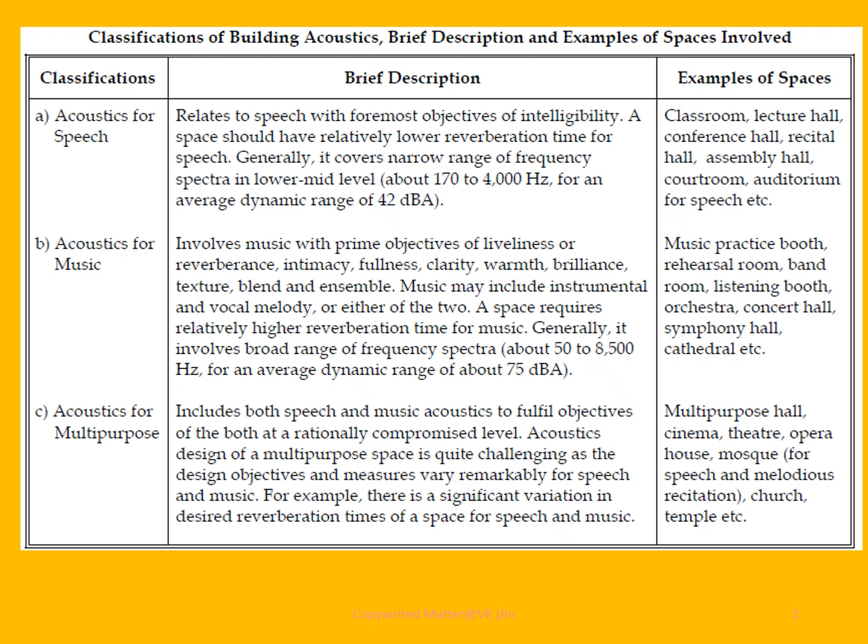This particular multipurpose acoustics is used in multipurpose hall, cinema, theater, opera house, mosque for speech and melodious recitations, church and temples.

Friends, some useful definitions with respect to auditoria. Auditoria is an enclosure, covered or open, where people can assemble for watching a performance given on the stage. Cinema: an auditorium where the performance is in the form of pictures projected on a screen with or without the

accompaniment of scenic atmosphere. Next is conference hall, a hall intended for use by participants, sometimes with non-participating audience also, in a discussion or deliberation of a topic in the form of speech or conversation made by one person at a time seated anywhere in the hall.

Crush hall, the first entrance hall, sometimes provided in addition to foyer outside the main hall for purposes such as buying tickets, waiting, etc. Aisle, the gangways left within and around the sitting area for walking into or out of a group of seats, to be continued.

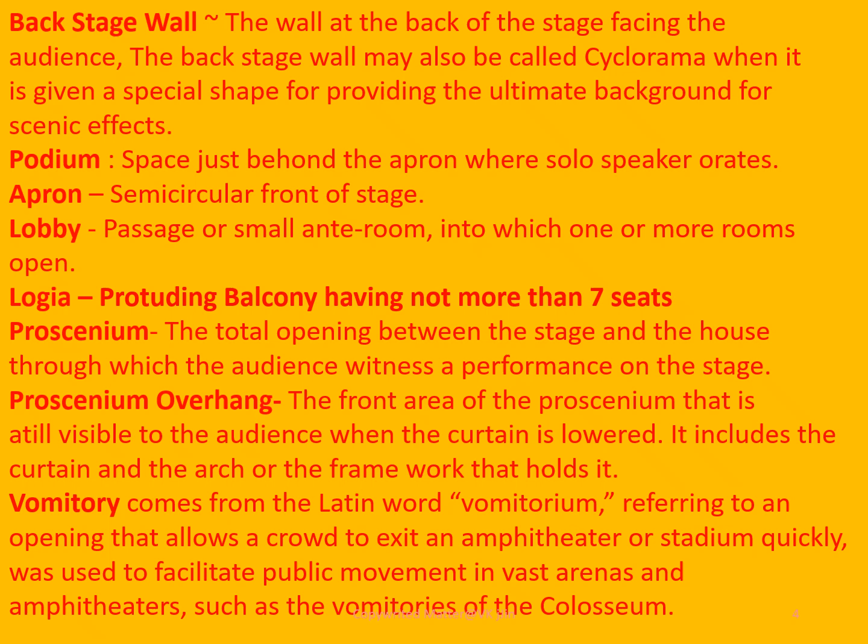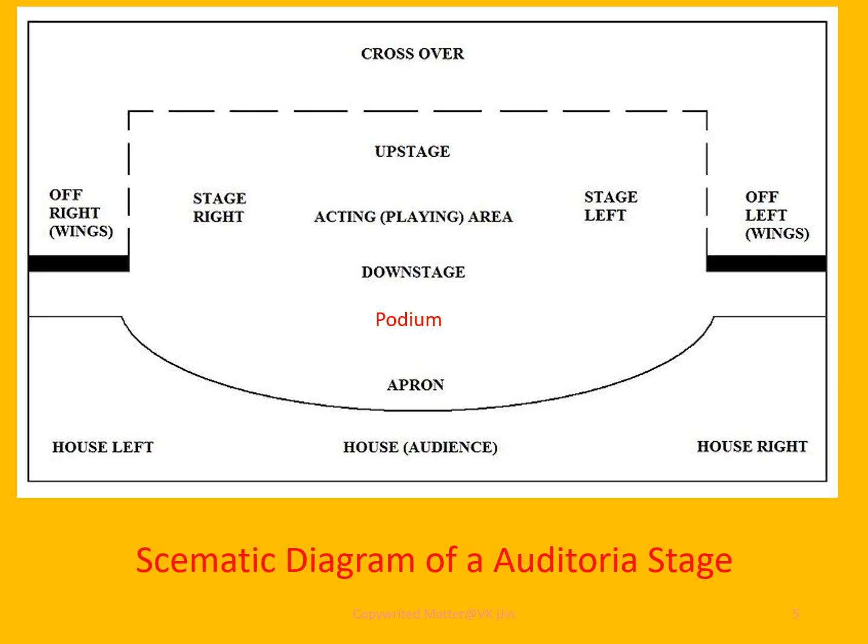Friends, now on to cyclorama. A cyclorama is a large curtain or wall, often concave, positioned at the back of the stage area. It was popularized in the German theatre of the 19th century and continues in common usage today in theatres throughout the world.

A cyc can be made of unbleached canvas or muslin, smaller version. filled scrim popularized on Broadway in the 20th century. Or seamless, translucent plastic, often referred to as opera plastic.

The cyclorama can also be a plain cloth or plastered wall filling the rear of the stage of a TV studio, often used as a sky backing to the traditional set or as the main backing for a dance piece.

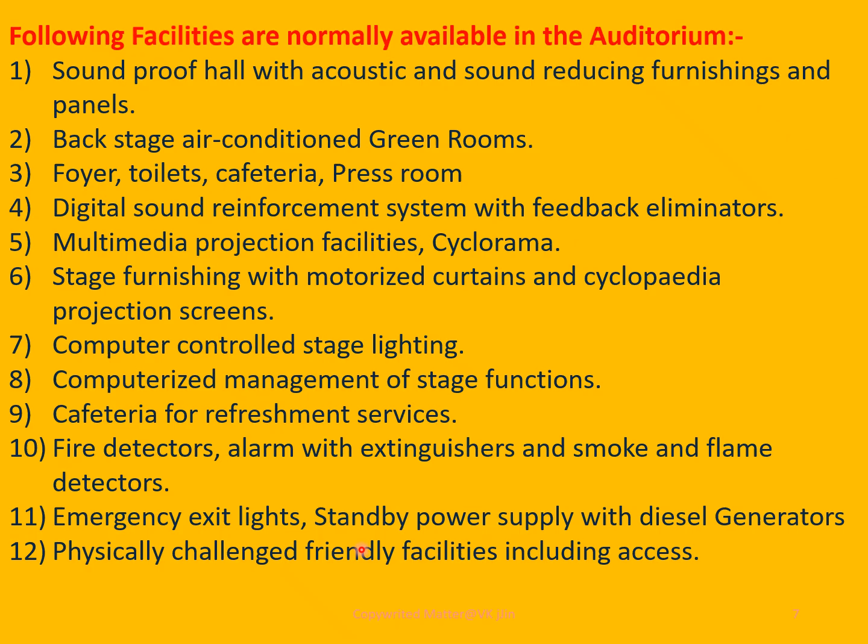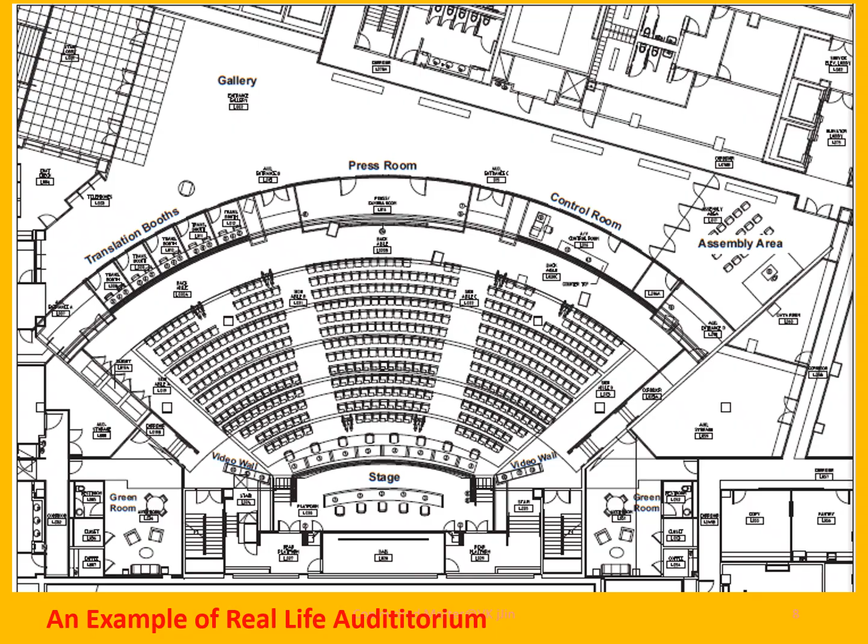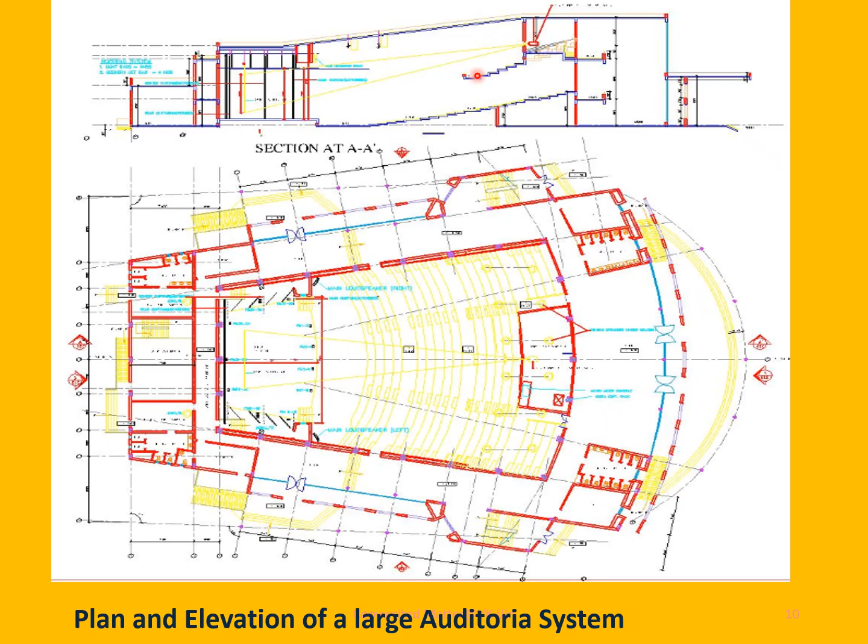Friends, this shows a detailed AutoCAD drawing of an auditorium. Pit tier refers to the rear section of seats on the main ground floor. This is the auditorium and various parts are shown here. Here is the proscenium box, then this is the apron area. There is an orchestra pit where musicians and other people can sit, which will not come into view of watchers.

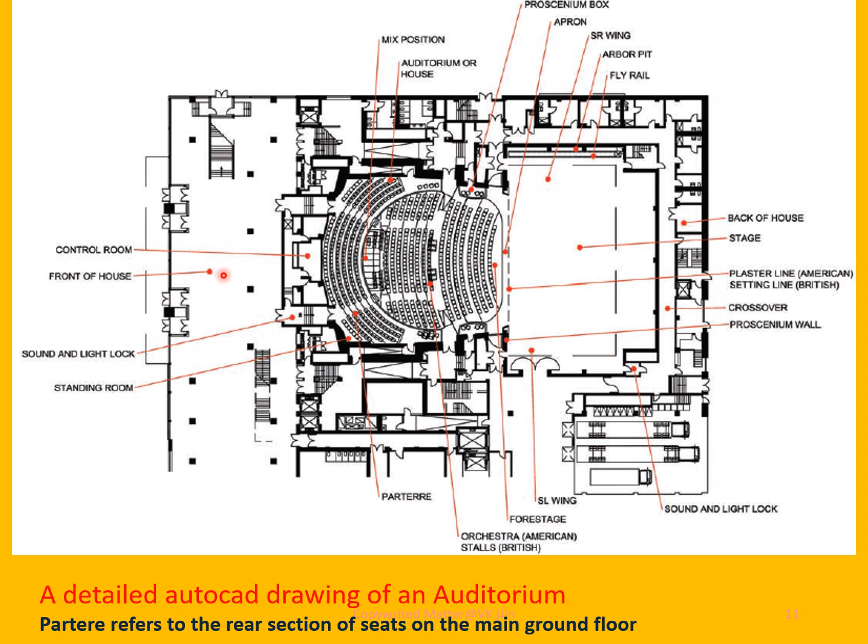Then we have others. This is the fore stage. This is the sound and light lock. This one is the orchestra. This is known as front of house. Here is a control room.

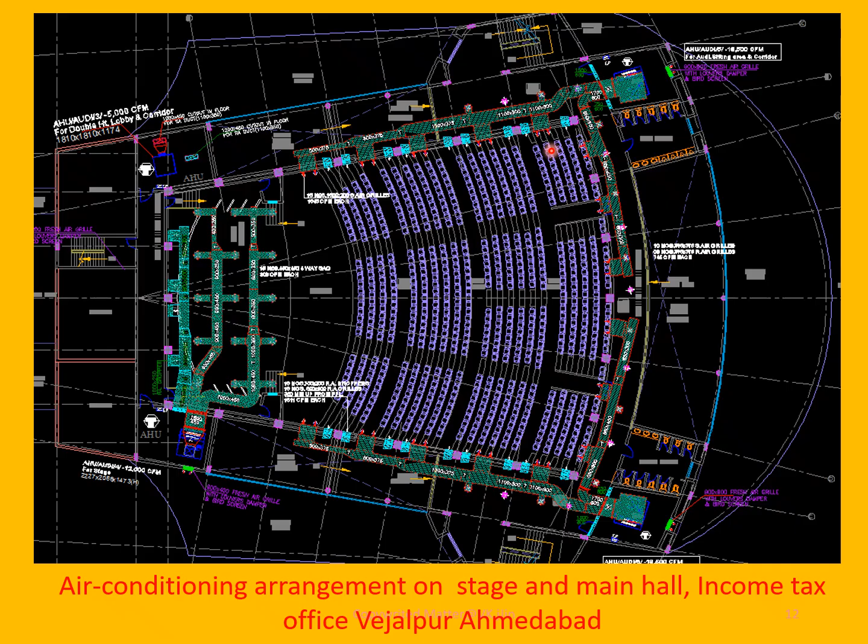Now, friends, this is about seating capacity and space requirement. The amount of space required for each auditorium depends on a number of factors, but the figure below provides an approximate guide. The calculations are based on a model design using 1.1 to 1.2 meters from seat back to seat back, and a 550 to 600 millimeter seat width.

For 200 seats, we require approximately a constructed area of 270 square meters. For 150 seats, it is 190 square meters. For 75 seats, it is 125 square meters. These 75 seats are generally used in medical college auditoriums.

The number of screens and auditorium capacity depend on many factors, ranging from audience potential estimates and the programming range that is planned, to the finance available, and the characteristics and size of the site or building. In general, one medium or large auditorium seating at least 150 people is required. Typical capacity is around 200 to 230. This auditorium should be able to accommodate the peak audiences at weekends. People turned away from a full house may not return.

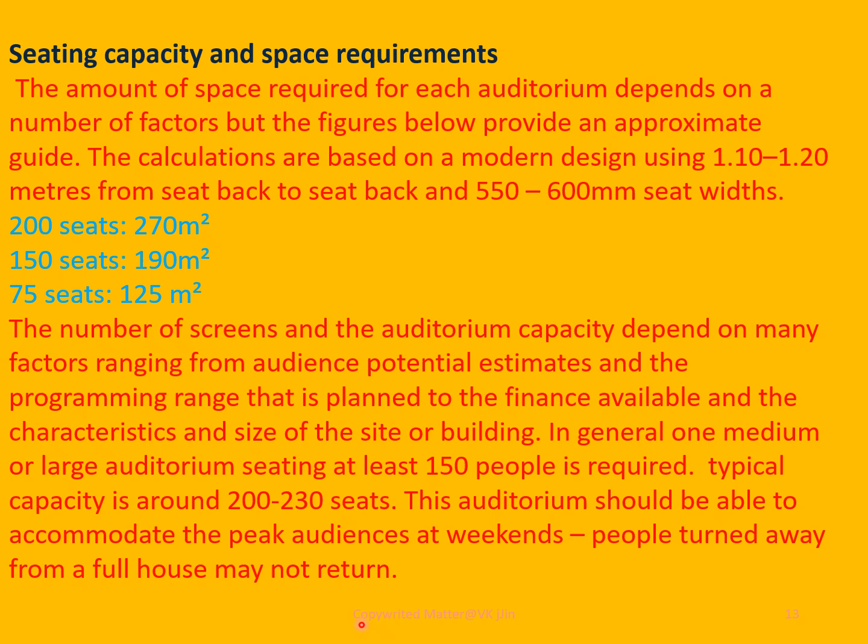Friends, now on background noise. Background noise is all the sounds one hears when the lecturer is not saying something. There are three types of background noise. Just sit and listen in most any meeting space and you can distinguish: first, operational system noise; second, outside noise; and third, self-generated audience noise due to clothing of listeners.

In order to achieve a strong signal to background noise ratio, the background noise has to be reduced to as quiet as possible. The operating system includes all things that operate in order to accommodate the occupancy of the auditorium.

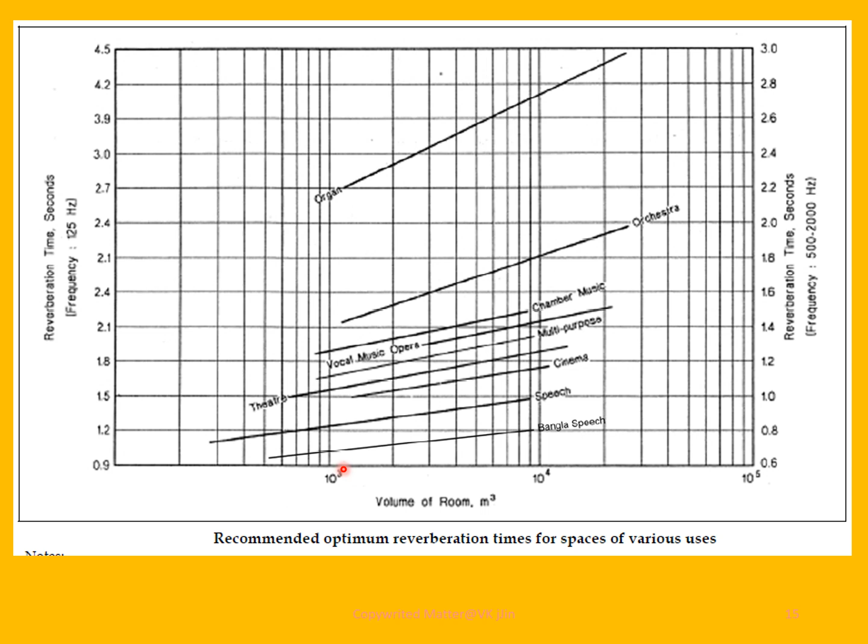Friends, now basics of auditorium design. The generally ambient noise level for an empty good auditorium would be about 25 to 30 dBA. This noise is the sound of the hall when everything is turned on - lights, air conditioning, and even the sound system. The only thing not happening is that someone is not talking into the mic. Only a fair good sound meter can measure sound levels this low.

Then we open the doors and the audience moves into the hall. The background noise level rises up to 35 dBA because of the breathing and other rustling that people naturally do. It is a well-established fact of human behavior that in a group we collectively manage to make just a little more noise than the background noise level. That is why we act quietly in a library and noisily in a packed diner.